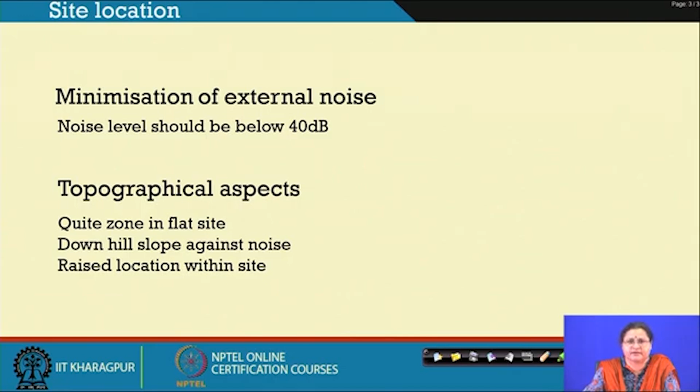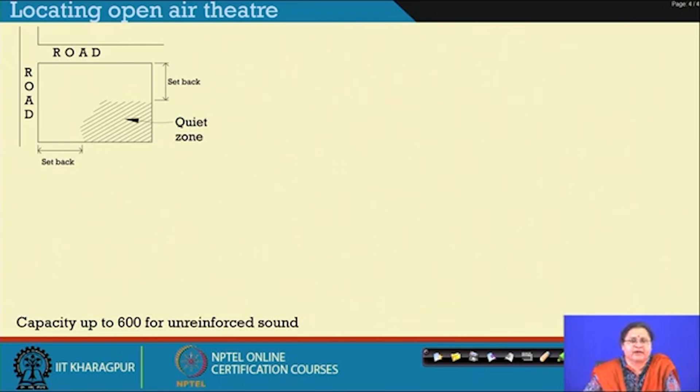So, when we think of locating an open air theatre in an urban scape, if the site is a rectangular plot as seen in the picture, and it is having adjoining roads at its side, we can see that the quiet area is actually forming at this particular zone. But if you see the other activities in the adjoining plots, you may come up with an understanding that these are also creating some noise. So, just putting a setback from the road can save your location from the roadside noise, but you may end up in some more noise from the activities on the adjoining sites.

So, you have to first understand where your site is located, what are the adjoining conditions that may have some influence or can add to the external noise to that particular site. So, in that case you can think that the central part of the site may be more comfortable so far as noise from outside is concerned. So, this decision has to be taken first before you start designing your open air theatre.

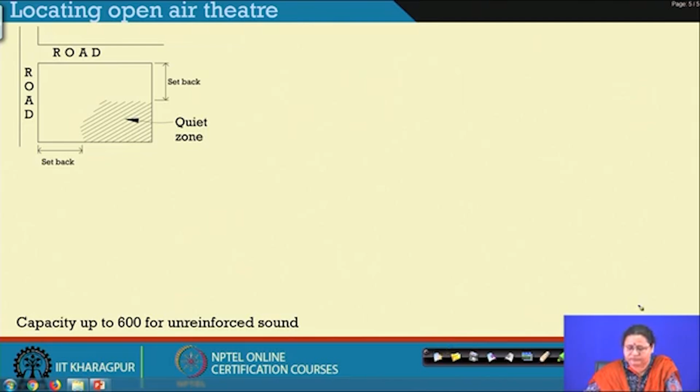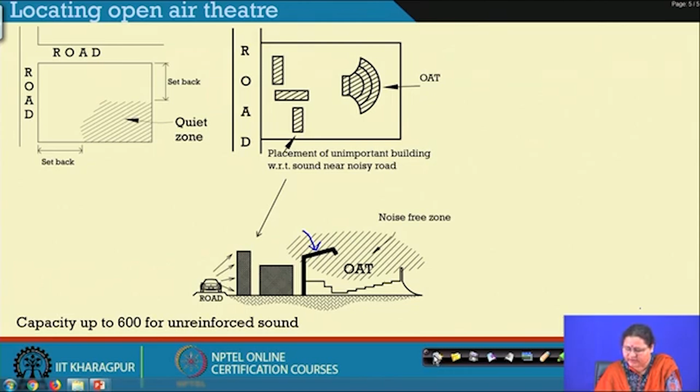So, if you have a road and other parameters quiet on the other sides, you can plan to cut down the noise from the road by placing a line of buildings which are not that important along the noisy road. These buildings act as a reflector to the sound created by the road and do not allow the sound to enter into the open air theatre area. Further, there is an addition of a backstage, a wall behind the stage, which can also protect this area. So, you can create a noise free zone within your site by a line of buildings or a back wall behind your stage, to protect your OAT from the external noise.

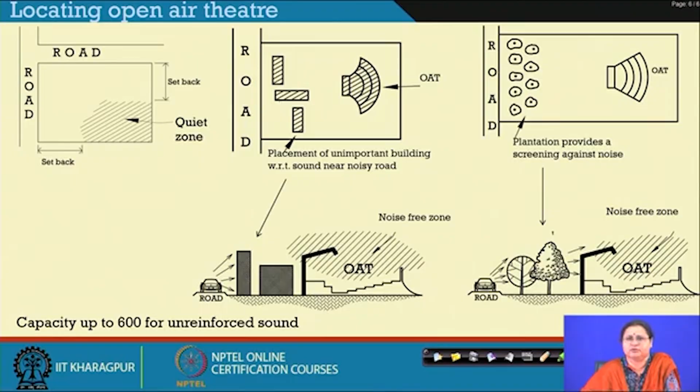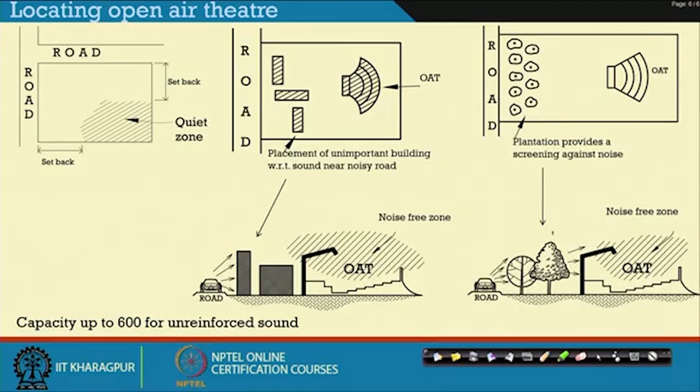Similarly, by putting a few lines of trees of different sizes of foliages, as we have discussed in the plantations and vegetations, with shrubbery heights of up to 10 to 12 meters, we can actually protect some amount of noise and allow the OAT to be in a noise free zone. Usually capacities of up to 600 do not require any amplification of the sound, and you can carry on with the performer's own voice.

Coming to the orientation, the time of the performance is very much important, along with it the study of the sun path. So, performers and the sun path, use of awnings and shadings which the Romans had thought of way back could be adapted, and the audience should not be facing the sun if the performances are during

As you remember, the temperature on the ground side is more, and that helps bend the sound to the upper side, creating sound shadow areas at the back. So, maybe the youths who are sitting at the back may not get any sound, not because the person on the stage is not speaking in a high voice or is not amplified, but because of the effect of temperature.

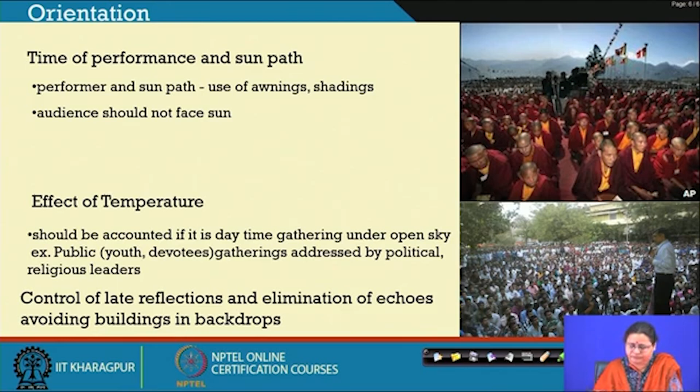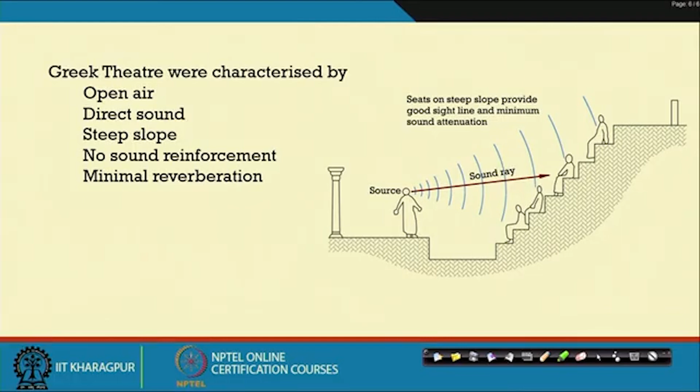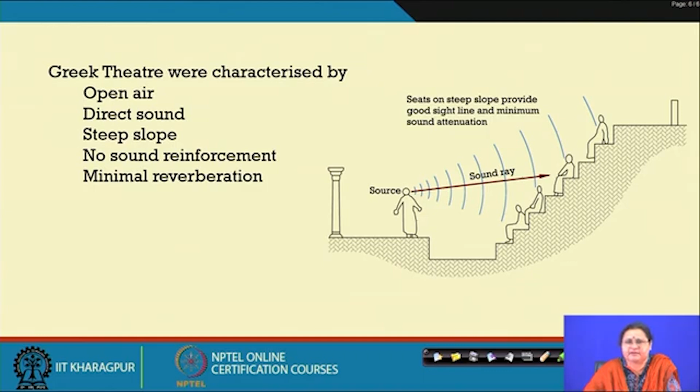If you remember the slide of the very first lecture, the Greek theatres were characterized by open air, direct sound moving to the top up to 60 meters. They had steep slopes of 2:1 and there was no sound reinforcement during those times. Reverberation was very much minimal in those kinds of structures. The same are adapted in our open air theatres also.

They also accounted for wind direction, which we have seen: if the speech is along the wind direction, it helps the sound to move to the furthest audience. So, accounting for the wind direction for acoustical advantage has to be kept in mind. Sufficient directly propagated sound has to reach, and we do not go for a very steep slope, but we prefer a slope at least greater than 12 degrees. So, this particular slope should be more than 12 degrees.

A hard surface here can help reflected sound to move towards the audience. If your source is here, your reflected sound from this area can move towards the audience. Yes, with the wall at the back of the stage, some amount of sound also can move towards the floor, because in an open air theatre there are very few chances of early reflections or helpful reflections to reinforce the source sound.

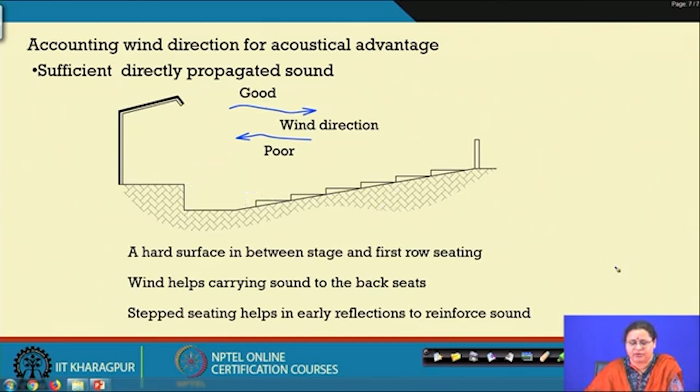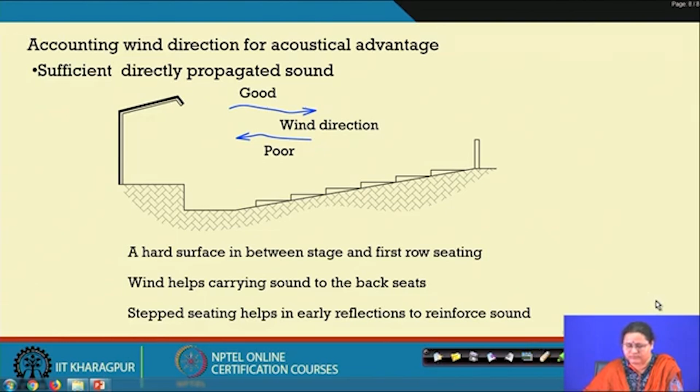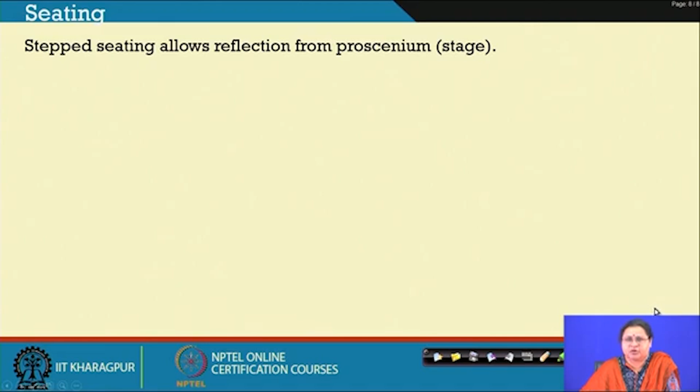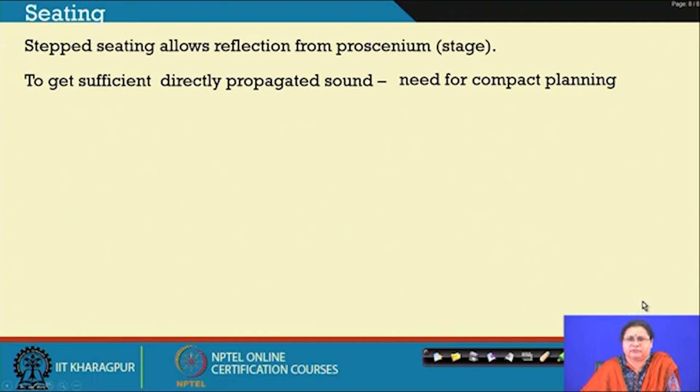So, coming to the seating, stepped seating allows the reflection from the proscenium side or the stage side. We will show that in a short while. To get sufficient directly propagated sound, we need compact planning. Welcome sound from first reflections. So, only the direct sound will not be enough for the last seats. We need the first reflections so that they can create a better sound quality within the space.

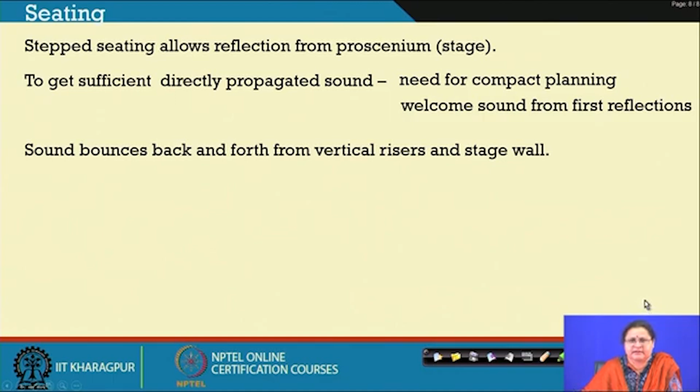Sound bounces back and forth from the vertical risers and the stage wall. So, we can take advantage of this to create first reflections, and these can actually help in creating a blended sound within the open air theatre. The major problem is this is not room acoustics; you are in the open air and reflections from the ceiling or the side walls are no longer prevalent. So, we are trying to take advantage of whatever reflecting areas we can add and take help of the first reflections for better hearing or better blending of the sound.

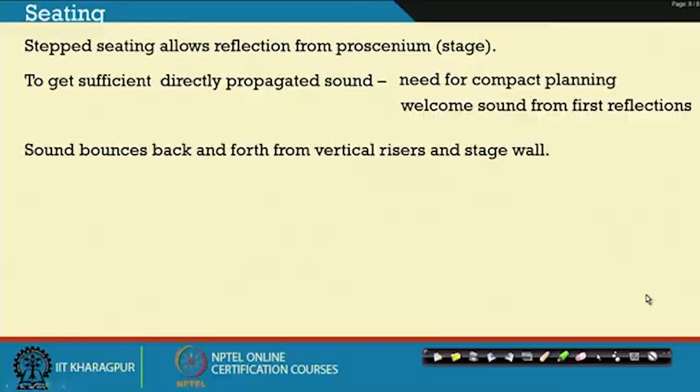Delayed reflections may happen from the back wall. If we plan for a back wall at the end of the OAT, then we have to check the delayed reflections or the echoes. So, the wall should be of that particular height. We will show in the next slides.

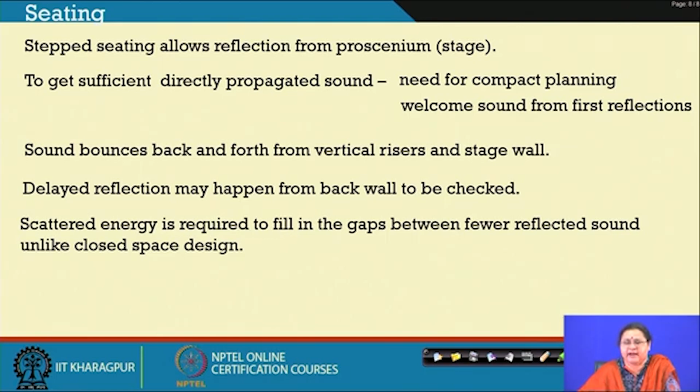Scattered energy is required to fill in the gaps between the first few reflections. Such scattered energy can be taken from the reflected sounds from the treads and the risers which form the open air theatre seating area. So, the gaps where there are no audiences really help in accumulating this scattered energy for better hearing or better quality of sound.

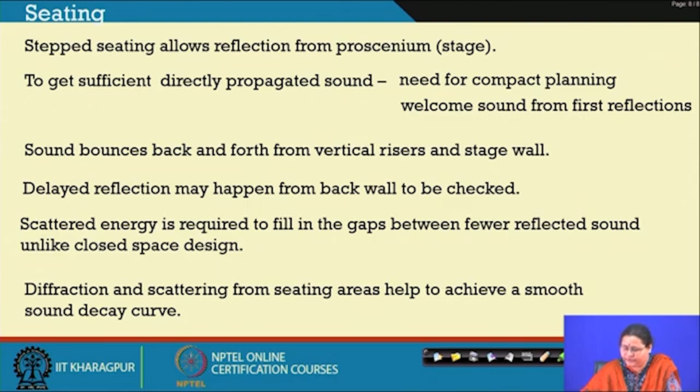Diffraction and scattering from seating areas help achieve the smooth decay curve. If you remember the decay curve and the reverberation time, which was the summation of so many early reflections, this is not actually happening here to create a blended sound. So, this diffracted and scattered sound adds on to the first reflections to achieve the smooth sound decay curve, creating a blended sound within the audience area.

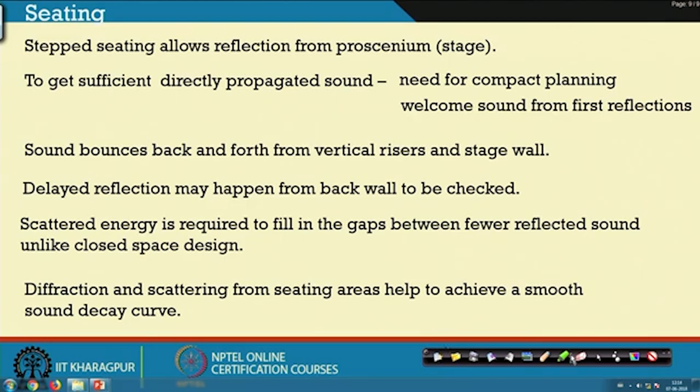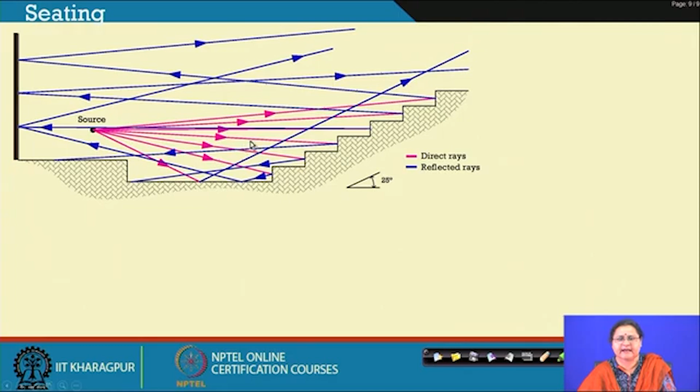So, here you see how the sound is moving. The direct lines are shown in pink and the reflected sound is shown in blue. So, taking advantage of the back wall here and of these risers here, some amount of early reflections are happening to reinforce the source sound, and the more you add to these, as these corrugated sheets are helping, the more blended sound and better quality of sound you get.

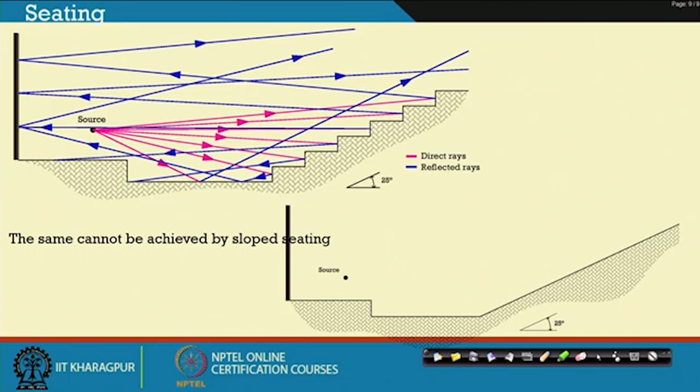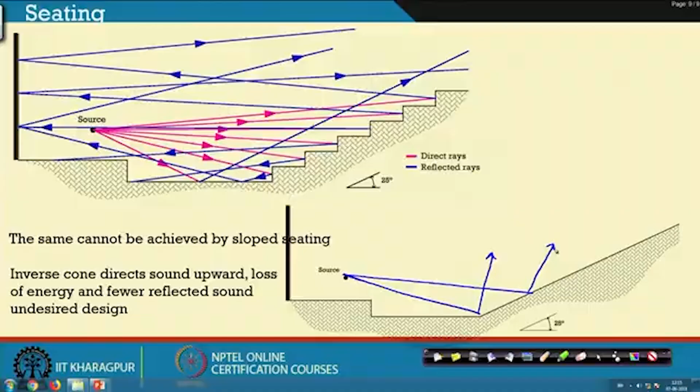If you see a flat slope, these multiple reflections are unable to happen. It is like an inverted cone. Whatever sound is falling here is getting into the open sky. So, with a flat slope you would end up with a bad quality of sound. The inverse cone directs the sound upwards, causing loss of energy and fewer early reflections, and it is an undesired design.

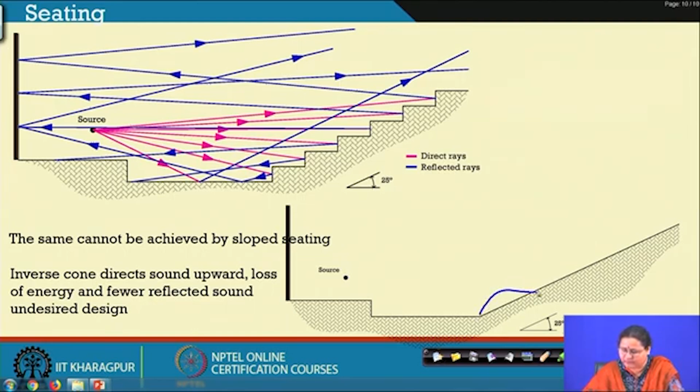If you end up with a mound, keeping it very green, you can plan for undulations. Those will help in scattering sound towards the audience. So, if your audience is sitting, they might get some scattered sound. So, undulated surfaces are better than flat slopes.

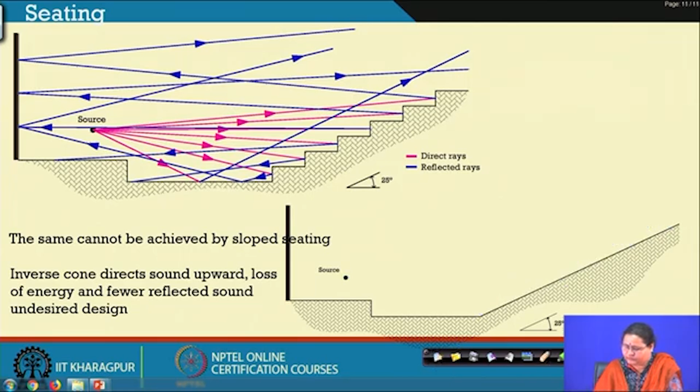So, sound reflected from the tiers of benches, if at a distance, can produce sustained echoes. So, these early reflections should happen in the front part of the open air theatre. We can even determine the pitch, which particular frequencies will be echoed, as we learnt in auditorium design. This causes distortion of some particular frequencies and may affect sound quality. The echelon effect of auditorium design can happen with this kind of corrugated seating.

In an OAT, the frequency dependent reflections generally pass overhead, but they can converge to the stage, disturbing the performers. Because the seats are circular, they can create a concave effect and all focus back to the stage, so the performers hear disturbed sound from the audience side. A covering over the stage helps cut down the late reflections coming back from the concave surfaces of the seating area.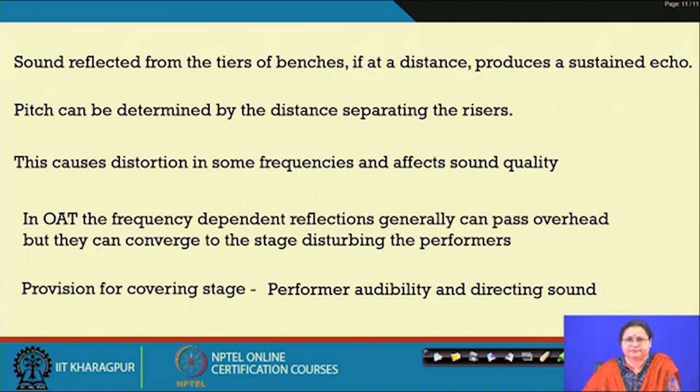So, if this is the stage area and these are the concentric seatings, the sound may get reflected back towards the stage area from the back seats. So, this can create an echo condition, that is, the source gets the sound back later as a late reflection from the back seat curvature.

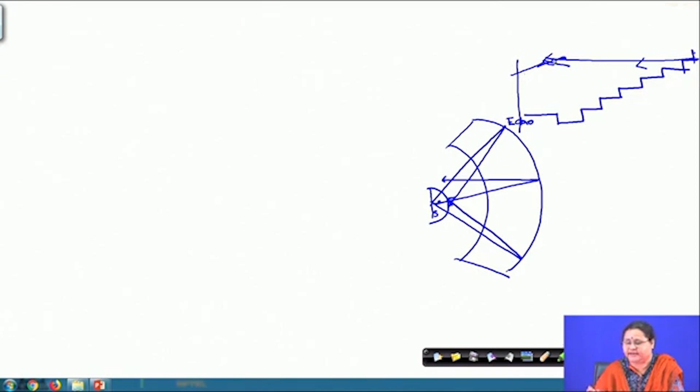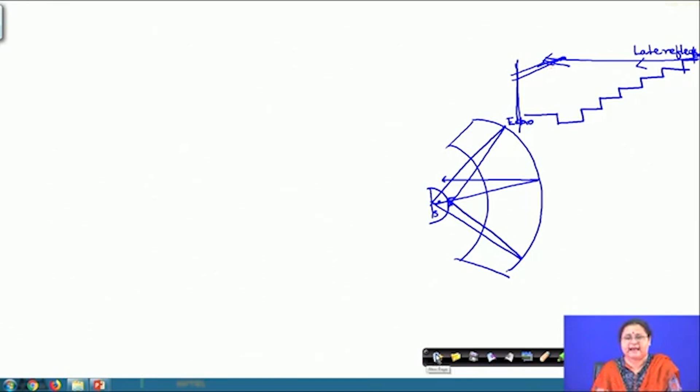As you move to the back, the height is gaining. So, if you create an awning or support over the stage at a certain height, you can cut down the late reflections coming back from the back of the seating. So, this convergence of sound towards the stage can be cut down with the help of the awning over the stage. These are to be calculated specific to your site.

Condition for stopping echoes towards the audience: you can create a back wall, but if your source sound is hitting directly the features at the back, like a building or a tree or a line of foliage, they can echo back partially towards the audience. A brick or concrete building will absorb very little and most of the energy comes back as echo, while trees absorb a small portion and reflect back a small portion depending on the amount of foliage.

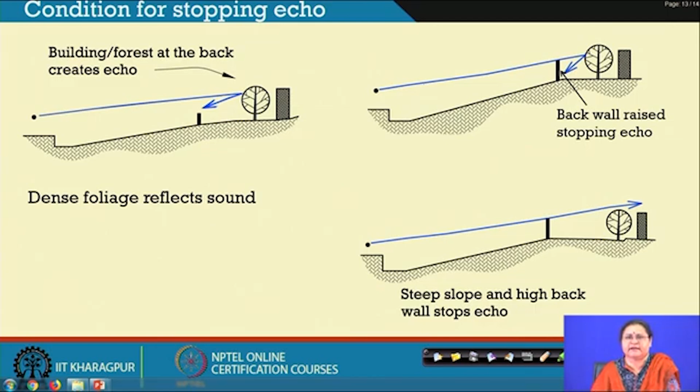If you see this picture, you will see the wall has been raised, and that is stopping the return sound just by creating a guard wall at the back end. So the rear end wall is very important and has to be taken care of accordingly.

If you have a very high back wall, it will completely stop echoes. So the sound coming from the source, going far, will just move out from the particular area. That is also not much desired.

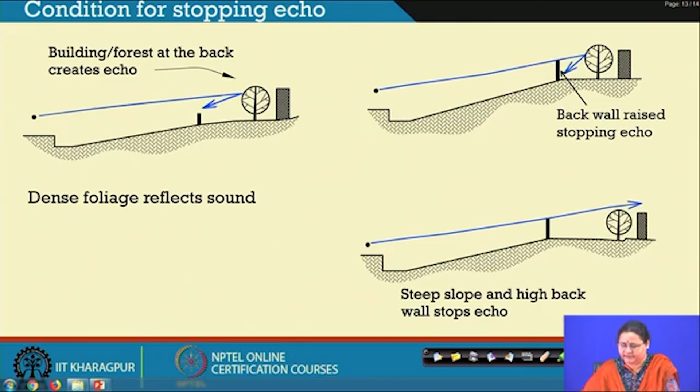Now, to see how we can increase the lateral reflections for an open air theatre, because on top we cannot provide anything, there is no ceiling. You see here a side wall planned. These side walls can also help in reflecting sound towards the audience, accounted as lateral reflections. Nowadays these side walls are made so sound can be pushed more towards the audience side.

A percentage of the sound energy moves back towards the audience, helping in early reflections or in better blending of sound. So this creates a closed space kind of plan, and you have to keep in mind that you have to provide openings for people to enter into these places.

So if you can keep minimal entry through these walls, or plan for indirect entry... if you have a side wall planned in this fashion, your entries could be planned from this way, and these walls could help with early reflections towards the audience. So entry should be planned accordingly so that it does not cut down lateral reflections in the process.

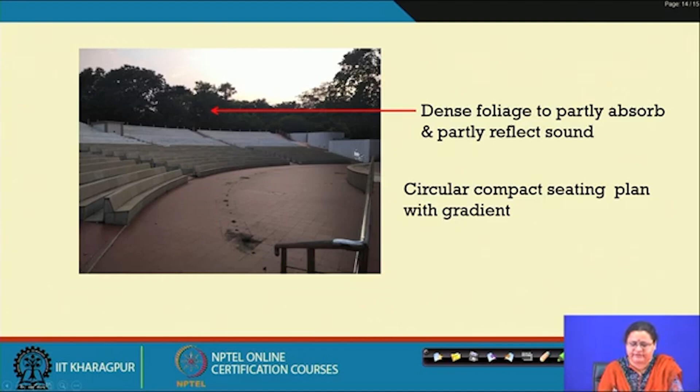Here is the open air theatre at IIT Kharagpur. You can see trees at the back which help absorb some amount of sound as well as reflect back some amount of sound. You can see the raised stage, the circular compact seating plan with a gradient, and the stage with lateral walls of different shapes at the side.

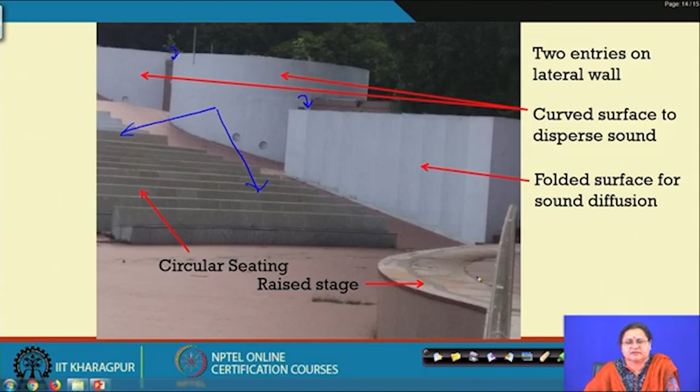These corrugated features will help in diffusing sound towards the audience, and there is another surface here with a different radius of curvature. You see the entries are planned at different points here. This is how the adaptation of the same principles has been applied in today's open air theatres, keeping the basic principles the same.

Now I will give you a small example of a stadium. Open air stadiums nowadays are covered with fiberglass, ETFE or PTFE sheets, and when crowds shout towards the players, it creates sound of around 95 to 105 decibels, even up to 110, and sometimes records reach 110 decibels.

And all those sounds are directed towards the field. So if you have a curvature or covering which directs the sound towards the field, then it is okay. Otherwise, this amount of noise will not allow other spectators to listen to the announcements or the speech being discussed during the game.

So usually these stadiums are not designed for audibility; the performance is not about sound but more about viewing, yet sound produced from the crowd reaches the field. Steeper grandstands make more noise since the fans get closer to the playing field, and a roof or dome holds the noise as it directs the sound towards the field. This concept of covering these kinds of stadiums is to be kept in mind while thinking of open air stadiums being covered.

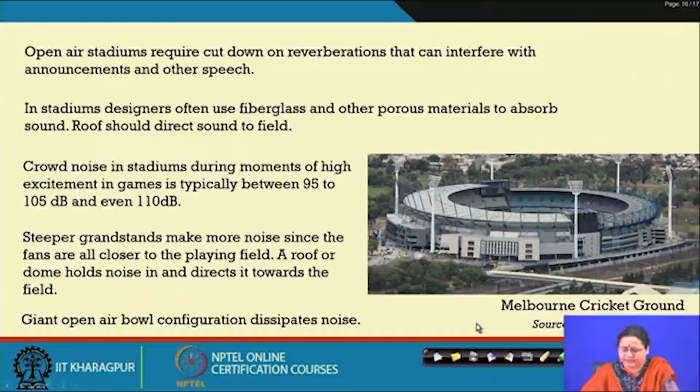So with this I finish this particular lecture. You have to adapt the principles as and when required in the way you really want to apply them in the particular domain of architectural acoustics.